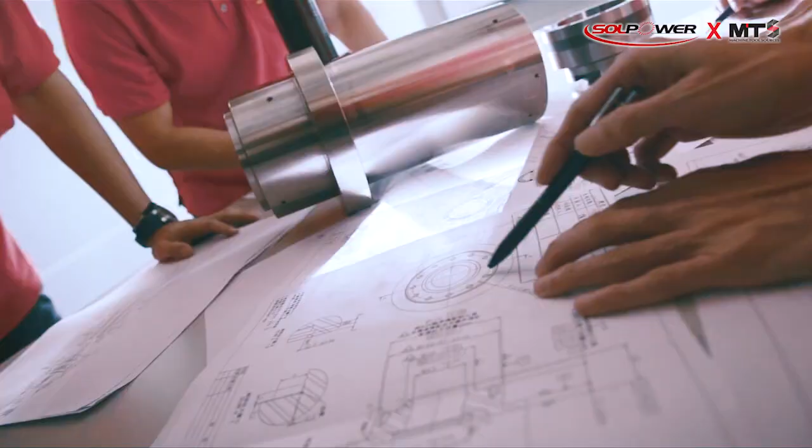We also have some components here, components of a motorized spindle. So what are we seeing here in front of us? Well, it's just a few components. The motorized spindle itself has a lot of components, but generally speaking, the most important parts are the shaft itself, the spacer, the encoder, and the bearings, front and rear bearing. And of course we could get into even more details, but we're trying to get some of the most basic facts. I'll try my best to highlight some.

Now, the spindles. We see three types here in front of us to illustrate the different applications. Maybe you can share a little about the main applications here at Solpower. The milling spindle for milling applications, turning built-in spindle, and woodworking. Also for woodworking, built-in motor applications as well.

Now, I just mentioned benefits of motorized spindles. We talked about the saved space, but there is more. So why don't you give us the main advantages of a motorized spindle compared to other spindle types? Well, the main advantages are high speed, higher speed, high precision, low vibration, very small size, and very easy to install.

We'll be talking about all those things in more detail in a few moments, and we'll also see some inspection processes, inspection equipment, QC, QA measures, and so on. But of course, quality starts at the very beginning, and the very beginning is the design process. So you manufacture and design your spindles 100% yourself, right? Absolutely, yes. So that's why we want to focus on the design process, and we're going to go through the main steps of your design process right now. Sounds good.

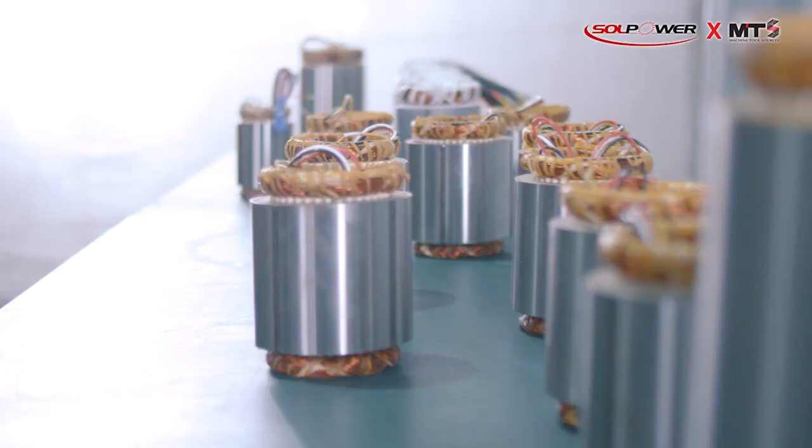Let me start with the heart of the motorized spindle: the motor itself. It's made in-house, we made it here at Solpower. So even the motor itself is manufactured by Solpower. Absolutely, you're not using motors from other manufacturers. No, for the past 25 years we have been manufacturing the motor itself. It's one of your core technologies, motors, right? Of course, yes. That's how Solpower started out, as a motor supplier.

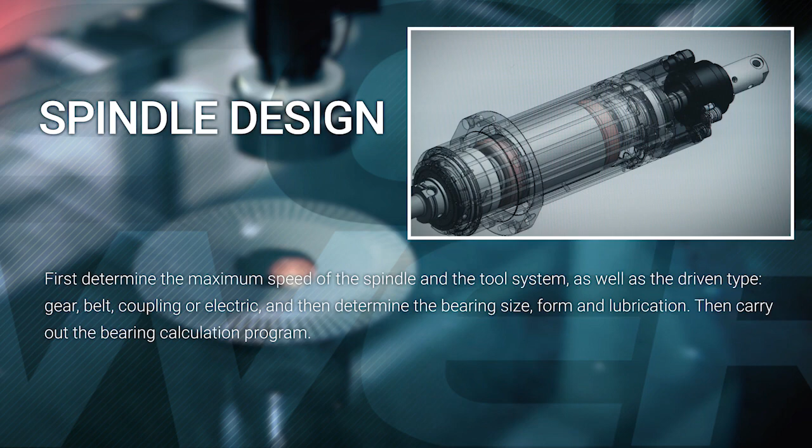So how do you want to show us and tell us about that design process? Okay, well, let's start off with taking a look at one of our motorized spindles. All right, yes, let's do it.

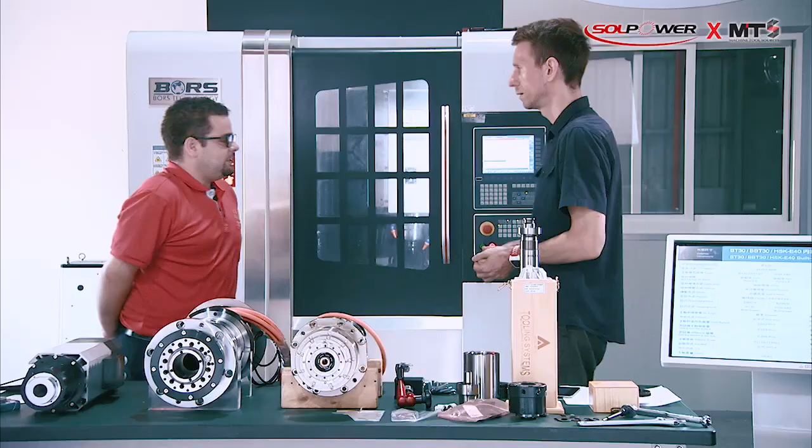So we're seeing a specification sheet of one of your spindles. Yes, this is one on our catalog. Our customers can find it on our page, one of your motorized spindles, that's what we're talking about today. So, well, what do we see? What do you want to tell us?

Well, before we start building and manufacturing the prototype, we have to determine three things. The first one is the interface, the housing. How big is it in terms of size?

And the second thing, we have to know the maximum speed of the motorized spindle, so the requirements of your customer. We have to determine that. Spindle speed, that's 24,000 RPM. That's pretty fast, right? Actually, pretty high, not that fast when it comes to Solpower.

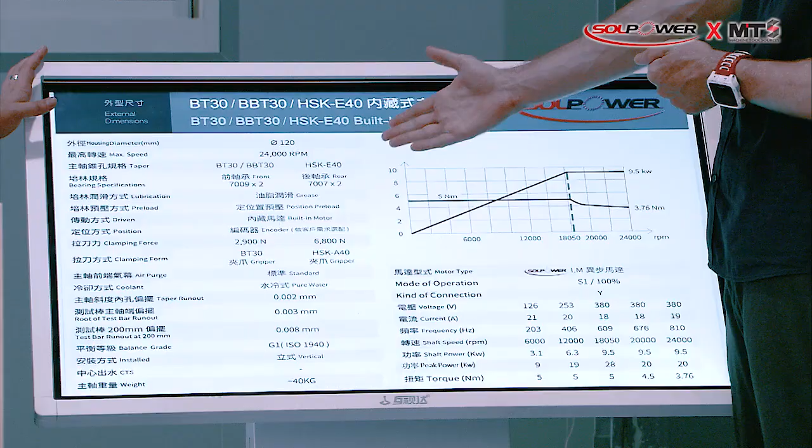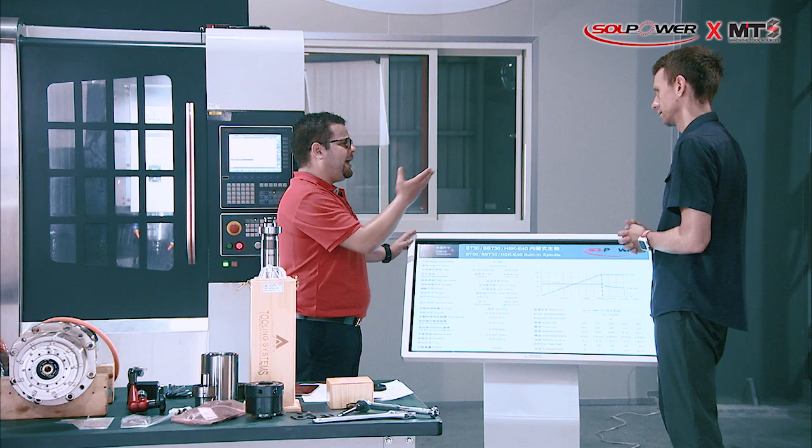The third thing we have to determine before we start the prototype is the bearing calculation procedure, what kind of tool system we're using, as you see here.

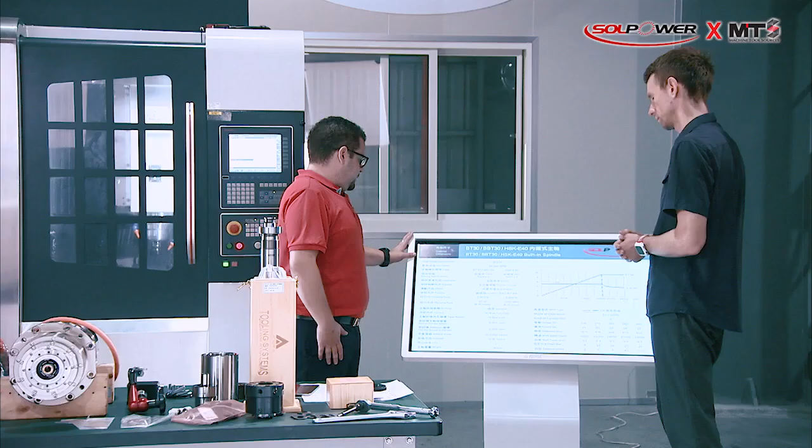So we've got all those parameters, and say I need a different diameter, different maximum spindle speed, and most of these parameters can be customized. Absolutely, yes. The housing, the speed, the bearing specification. The lubrication, it's grease, but some customers require oil air.

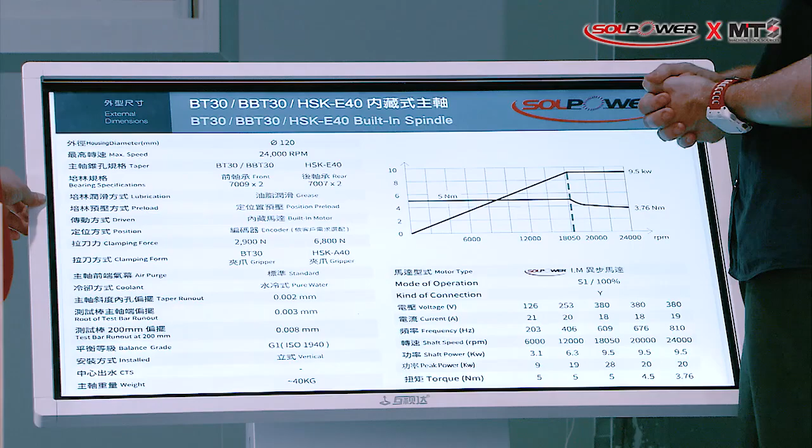See here, the built-in motor. Some customers require asynchronous, some require synchronous. Okay, so again, different types of motors as well.

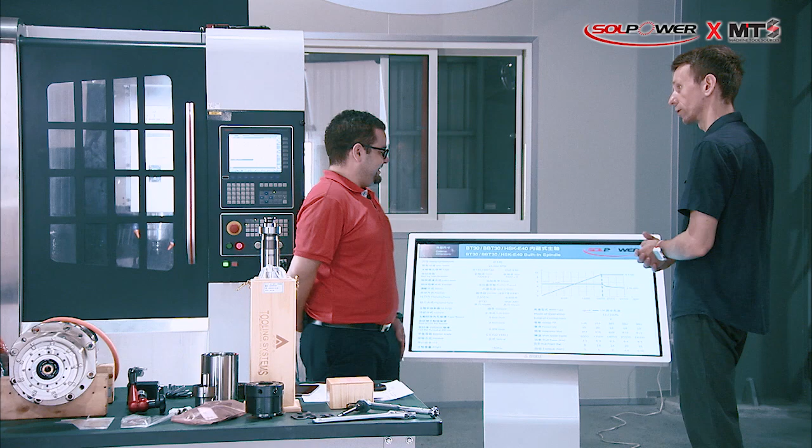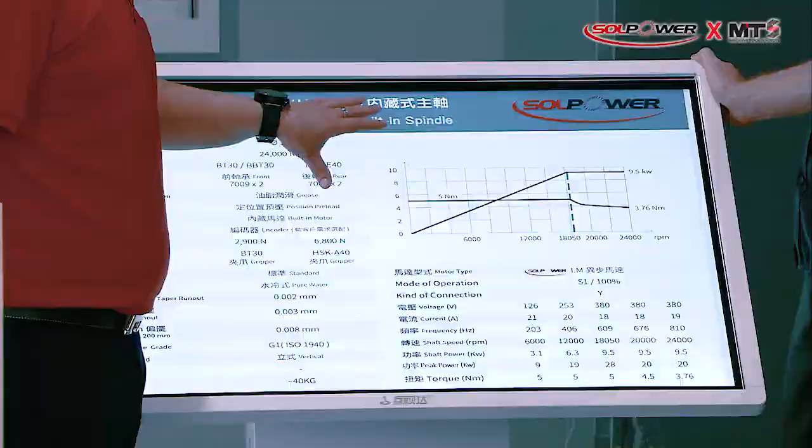We talked about the motor, you said it's the heart of the spindle, and we also have a spec sheet for a motor, right? Yes, of course. I have to specify something here. You will never see this kind of specification of a motorized spindle in any other companies. Why is that? For one reason, because we made this in-house.

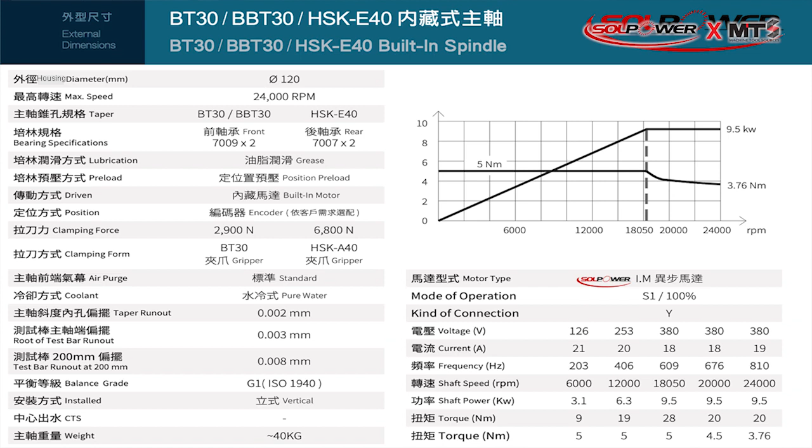The motor inside the spindle, so that's what we talked about already. You manufacture your motors 100% yourself, it's built in-house. So those are customized. Even the torque, the shaft power, the shaft speed, it can also be customized and up to the customers to decide that.

Great, so that's the very first step of the design process, just determining what do we need, what kind of specifications do we require from you. Well, after that, we'll make an initial blueprint of the bearing calculation procedure.

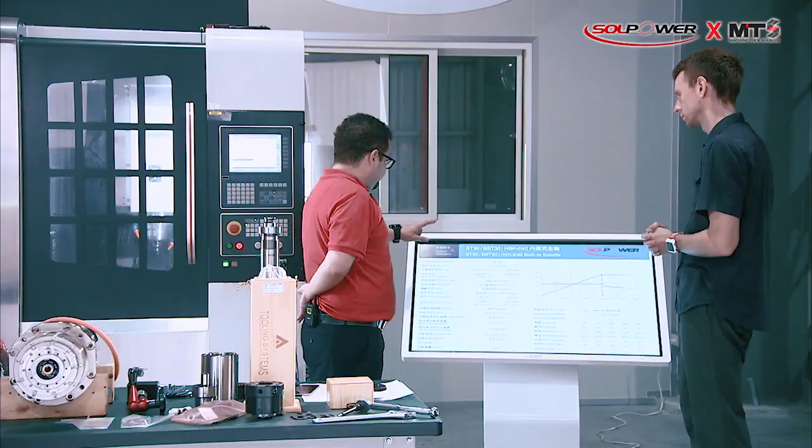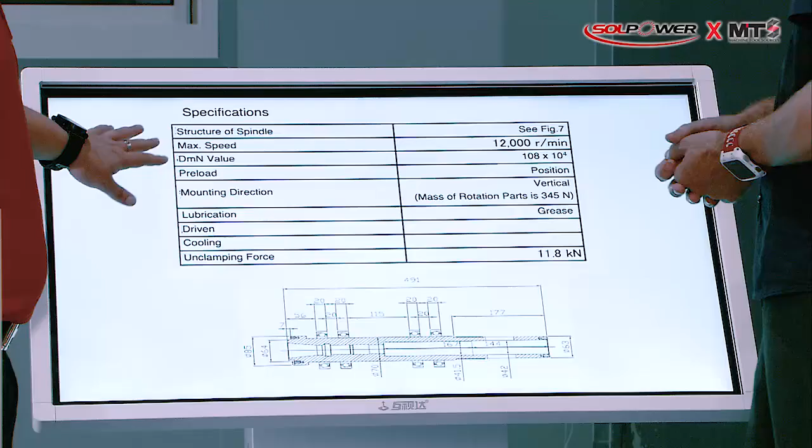Here you go, as you see, the first thing is the structure of the spindle. The second thing, we add the maximum speed. We'll add the DMN value. Here at Solpower, we can reach up to 200. And the mounting direction here is vertical, but of course it can be horizontal as well.

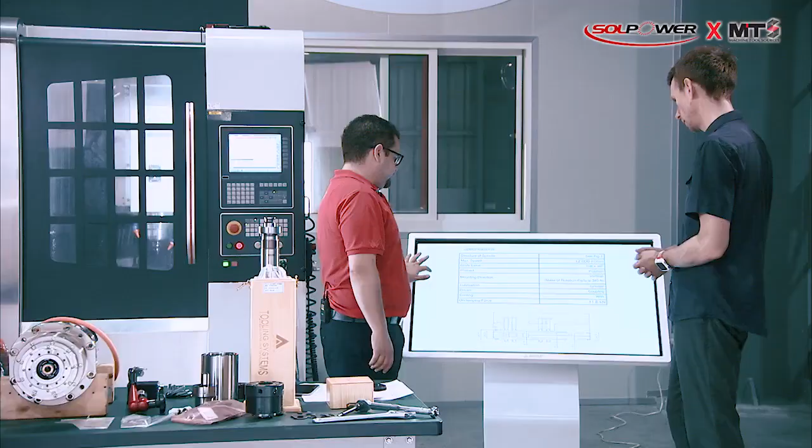The lubrication here is grease, but as you just mentioned, we can customize this to oil air as well. Here we use more of the design parameters. So what else do we want to focus on here in this chart?

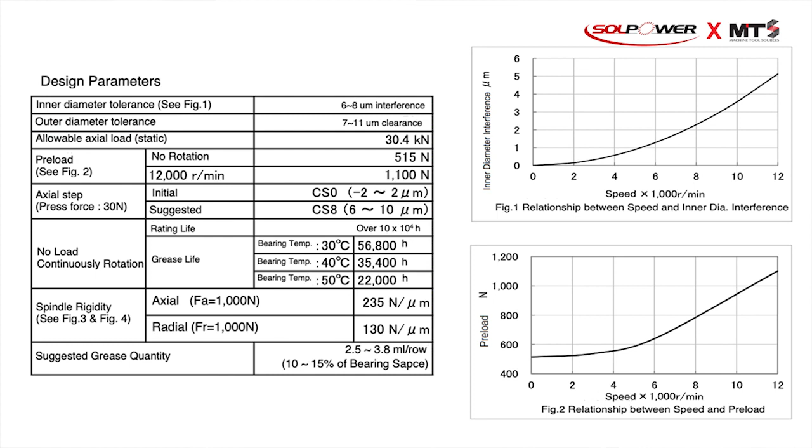Here we entered the interference value between the inner bearing, the inner rings of the bearing, and the shaft. And the second here, it's the clearance between the outer ring of the bearing and the housing. So this is obviously tolerance, we're talking about accuracy, interference and clearance as well.

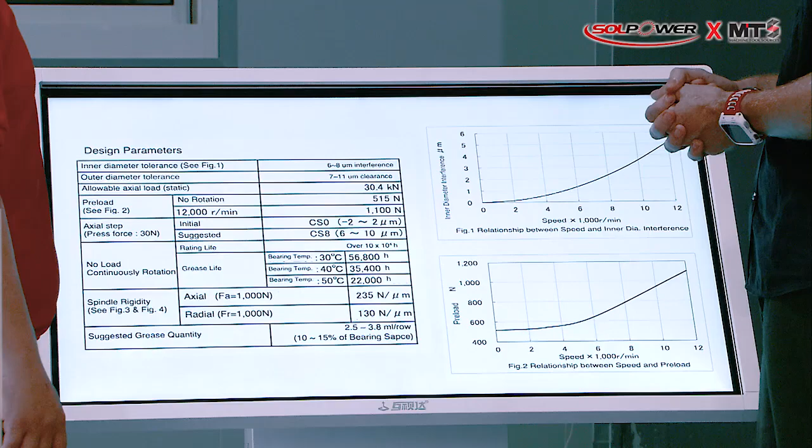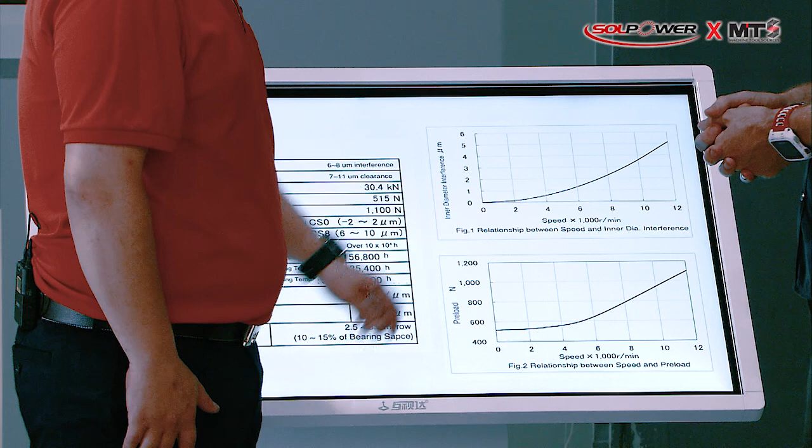Yes, of course, most importantly, we get the spindle rigidity. And as you know, the rigidity in the spindle is one of the most crucial, most important factors here, axial or radial. And those diagrams, those are the calculations, what you expect from this spindle performance. Yes, you can say so.

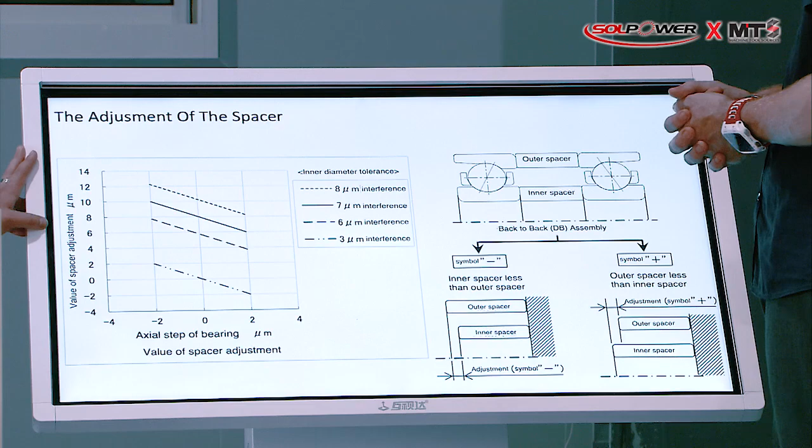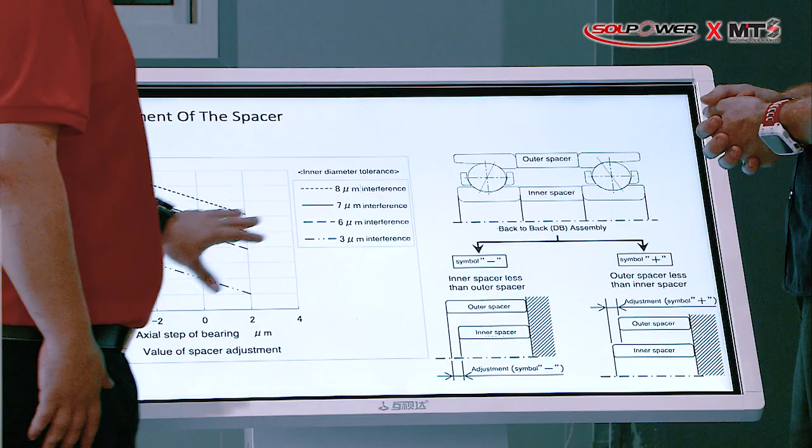And here, spacer, we use the correction amount of spacer data to do our preload adjustment. So here, the inner ring, the interference between the bearing inner ring and the shaft. Here, we'll know the correction amount data of the spacer ring which needs to be grinded. We can see very low tolerances, very high accuracy, and that's one of the main advantages of the motorized spindle.

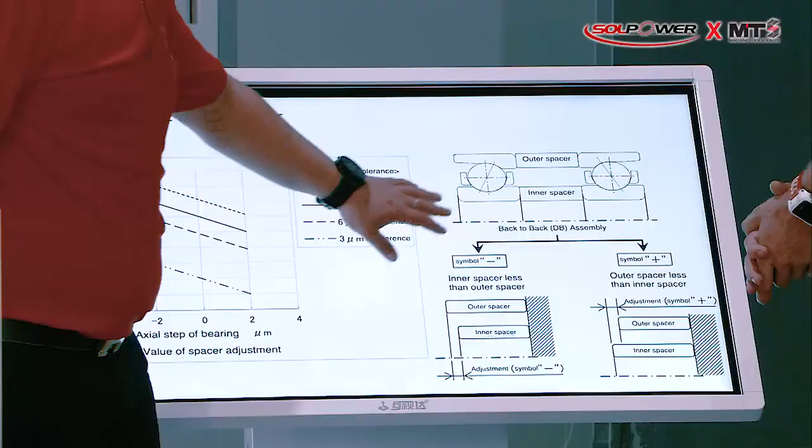When the outer ring of the spacer is higher than the inner one, the preload increases. When the outer ring of the spacer is lower than the inner one, the preload decreases.

That's the basic thing you have to pay attention to when it comes to the spacer. It's kind of an overview of the blueprint. At the very first stage of the design process, those were the basic calculations you have to perform on the bearing.

Yes, it's a must. And then the next step, before production, would be to manufacture a prototype. Let's talk about it more here.

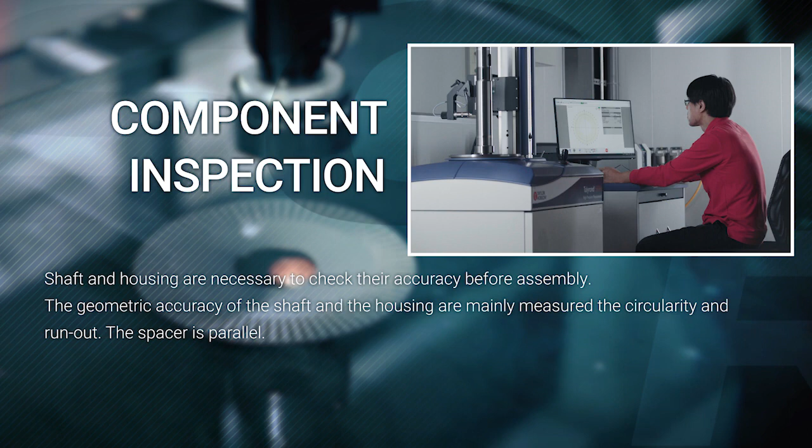We talked about the components earlier, shaft, spacer and whatnot. So how do you make sure that whatever design, drawing, and calculations, the theoretical stuff, you have the spindle that you want to manufacture, and then you have the prototype. How do you check the quality of these components to ensure the spindle performs as expected?

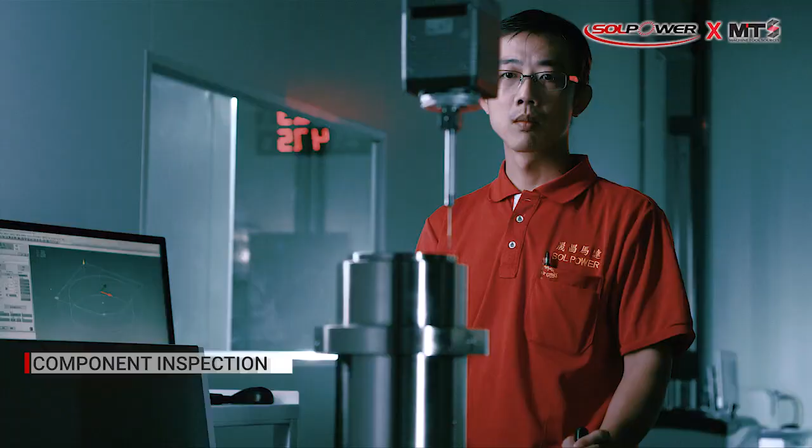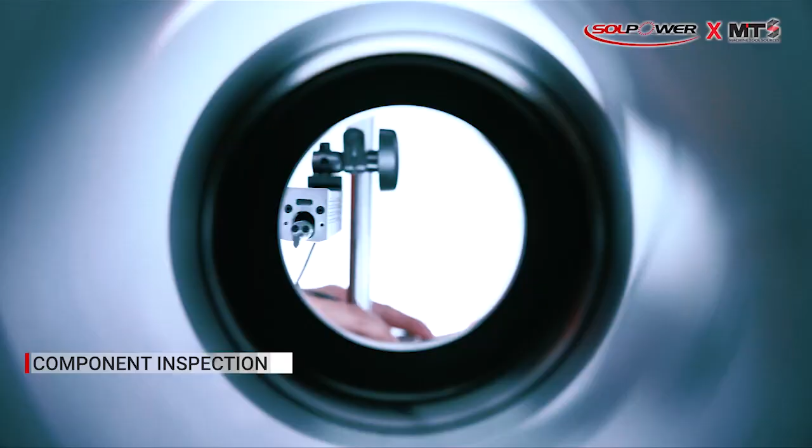Well, the inner parts of the motorized spindle are very, very important. We focus on the precision of it, it has to be ultra precision—the shaft, the spacer, etc. So we use many devices and instruments, such as roundness detection devices and 2D, 3D inspection instruments, to measure the deflection, the roundness, and the cylindricity.

Regarding the spacer ring, we focus on its parallelism—roundness testing, parallelism, and 3D coordinate measuring. You've got all that equipment here in-house, so you have the capabilities to perform those inspections. Absolutely, and I can take a look later on.

We'll split it up because there are two big areas when it comes to testing: dynamic measurements and static measurements. I think we also have the run-in and the clamping measurement. Do you want to show us some of the testing right now? Let's start with the dynamic measurement.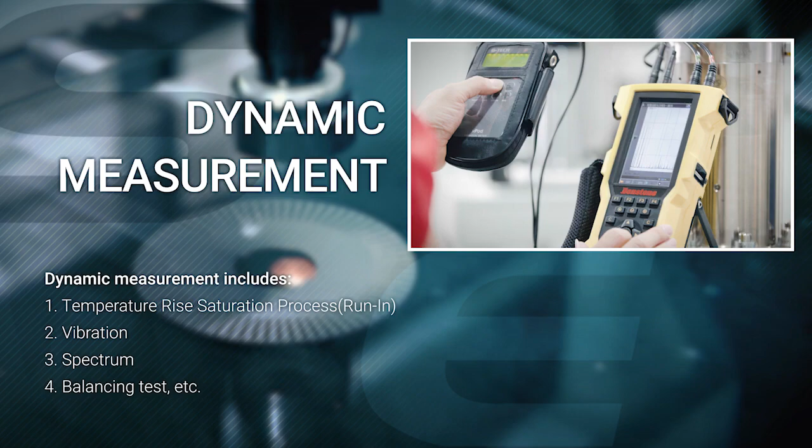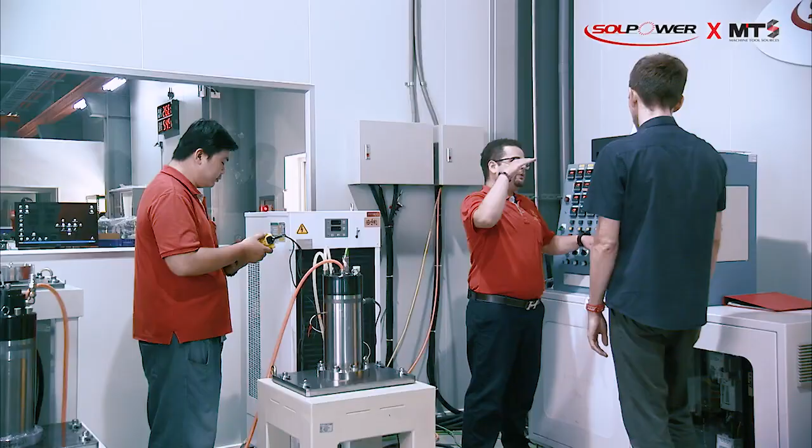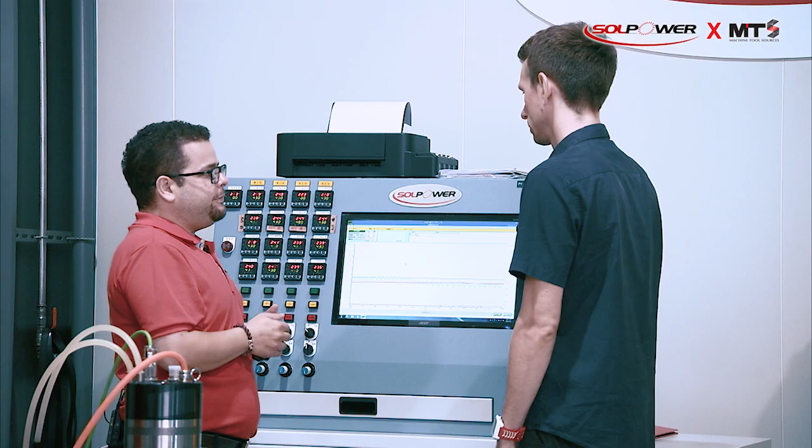One of our first items on the dynamic measurement testing for motorized spindles is the temperature saturation process, aka run-in test. Here we monitor and record the temperature rising stability from 0 to its maximum high speed RPM, adding 1000 RPM each time in incremental steps until we reach its highest rotation speed, measuring the temperature at each step.

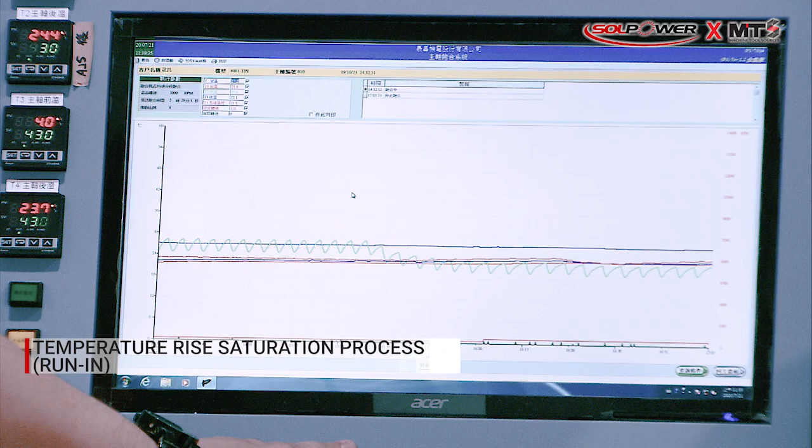As you see here, it's the temperature in degrees, the maximum is 60. Here is the timeline, and there is the revolution per minute, the RPM, spindle speed, until we reach its maximum. Under normal circumstances it won't exceed 30 degrees—that's the goal. We have to record every step all the way.

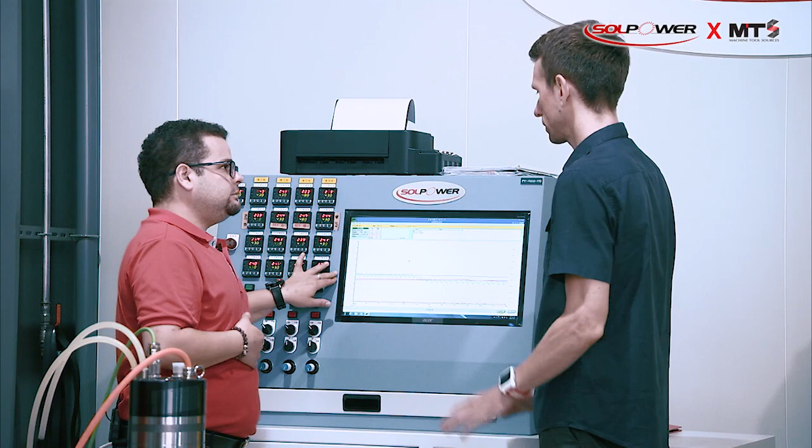So that was the run-in test, but that's only one of four items on the dynamic measurement list. What's up next, what else do we have?

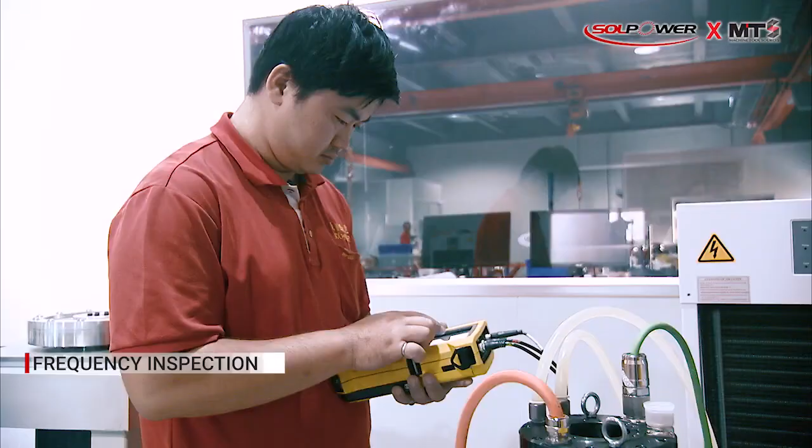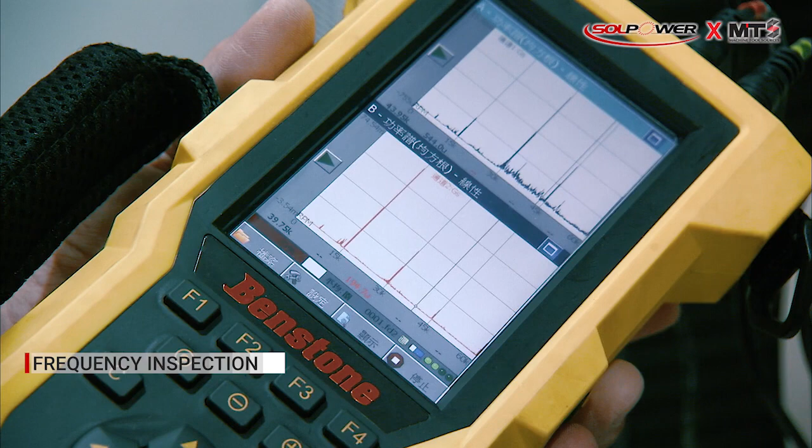The second thing I see here is the frequency measurement. The frequency analysis is to measure the spindle operation, making sure the spindle rotation is perfectly good. As you see on the screen, when the first, second, third order are gradually decreasing, that means the spindles are perfectly good—perfect Solpower quality.

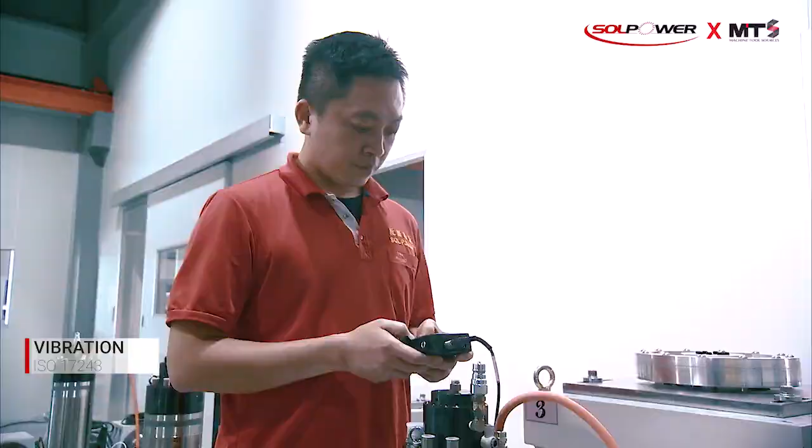Now another important topic, vibration. You want to keep it low, because it's very important for the accuracy—one of the main advantages of the spindle is to have low vibration. Our vibration measurement here at SolPower is based on ISO 17243, the highest international standards for vibration. The rotation speed starts from 600 RPM till 30,000 RPM, and it's also suitable for roller bearing and ball bearing as well.

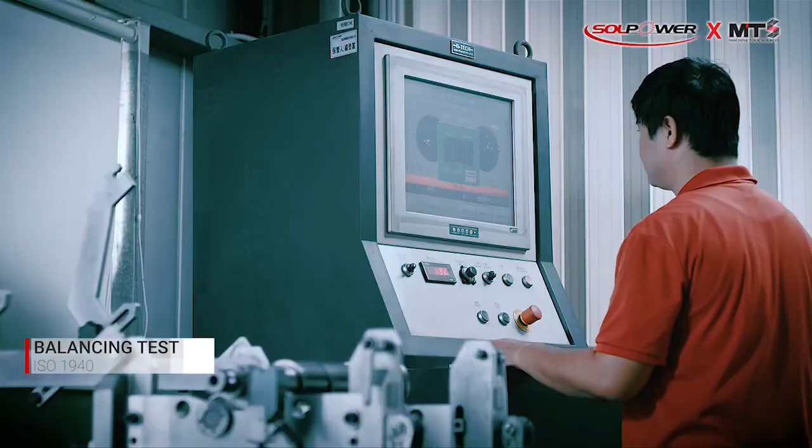So that's vibration testing. Now we have one more item on the list when it comes to dynamic measurements: balancing. We want to keep the spindle well balanced, to integrate the central line of mass with the rotational axis.

So we'll have high accuracy and a better surface finish, a higher removal rate, and increased tooling life. Four things people looking for a motorized spindle will very much care about. Of course, these are among the main advantages of the motorized spindle itself, to be very high accuracy, high precision.

And I think here you're also testing according to ISO standards, right? Yes, our balancing inspection here at SolPower is based on ISO 1940. So again, meeting international standards? Yes, absolutely.

Actually, the mechanism behind the motorized spindle is very complicated. It is indeed. Most of our dynamic measurements have to be done twice, so we have to make sure there's no space or place for error. So meeting 100% quality? Absolutely, 110%. Yes, excellent. So that was the balancing, the last item on our dynamic measurement list.

But now we want to move on to the static measurements. Yes, and I believe we have to go to another area. You want to take me there now? Yes, please. Let's go.

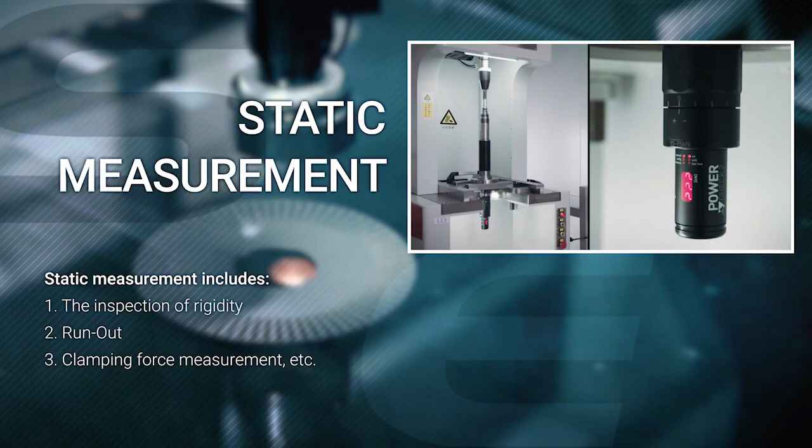All right, Sam, so we just covered dynamic measurements and now we want to talk about static measurements, right? Of course. We're going to start talking about rigidity first, then clamping force, then we'll end up with run out.

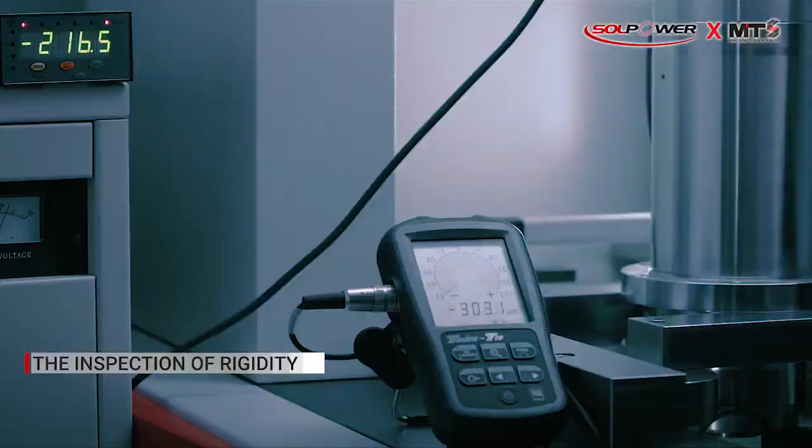Well, at SolPower here we have to focus on two things: the axial rigidity and the radial rigidity. These are very important. Obviously rigidity is very important because it has a lot to do with the quality of the workpiece you're working on. So those inspections, the axial and the radial, have to pass our measurement, in order to ensure our customer that he can get the quality he required. That's the main target, that's the main goal.

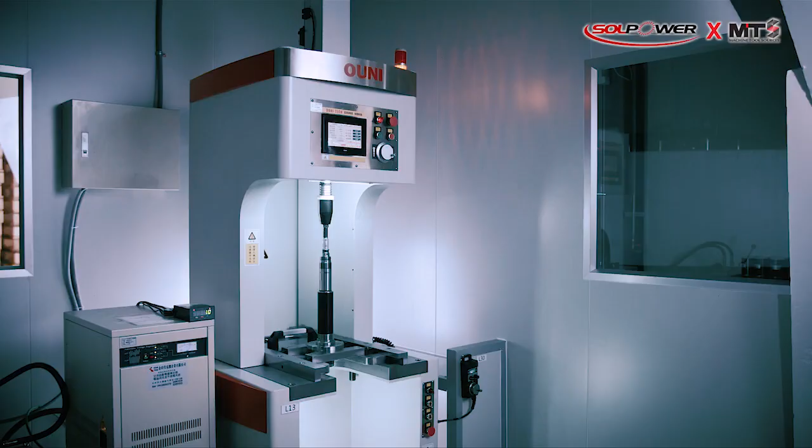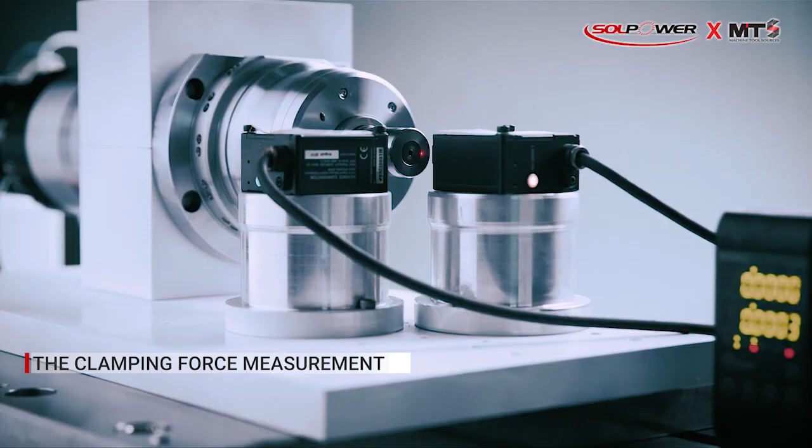Okay, so what else do we have? We have the clamping force. Besides testing the clamping force, we need to test the draw bar endurance. Besides the draw bar, we have the axial thermal growth of the shaft. Very technical, yes, because we have to ensure the quality of our motorized spindle, our built-in spindle, in order to get the best quality we can achieve.

Okay, we just talked about the dynamic measurements, then the static measurements and additional inspections. So altogether, I think like 10, 11, 12 different inspection procedures for your motorized spindle. Well, I stopped counting a while ago. I don't know how many, but it's quite a lot, and I think there's even more that you want to talk about. The mechanism behind that is very, very wide.

And another thing you mentioned earlier is the runouts. I think there's a runout still, yes. Okay, finally we're going to be talking about the runout. There are 4 positions to measure before shipping out the spindle itself.

The taper, inside the taper, we have to measure the accuracy. It should be, and actually it must be, less than or equal to 0.002 millimeter. The second position is the taper face itself, outside. We have to measure it the same way, with the same tolerance of 0.002 millimeters.

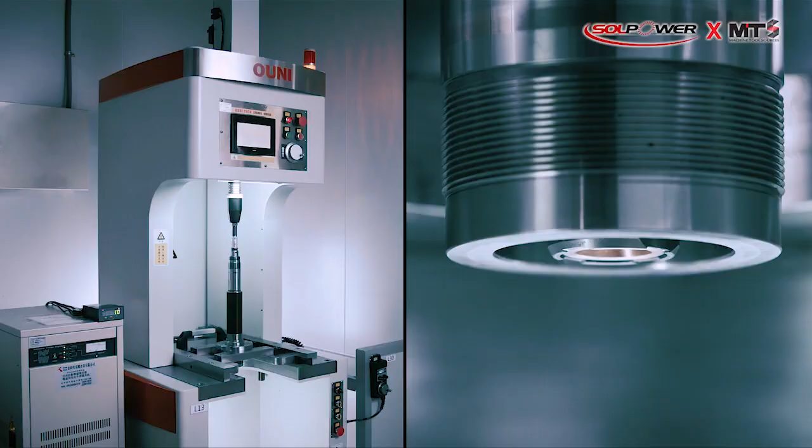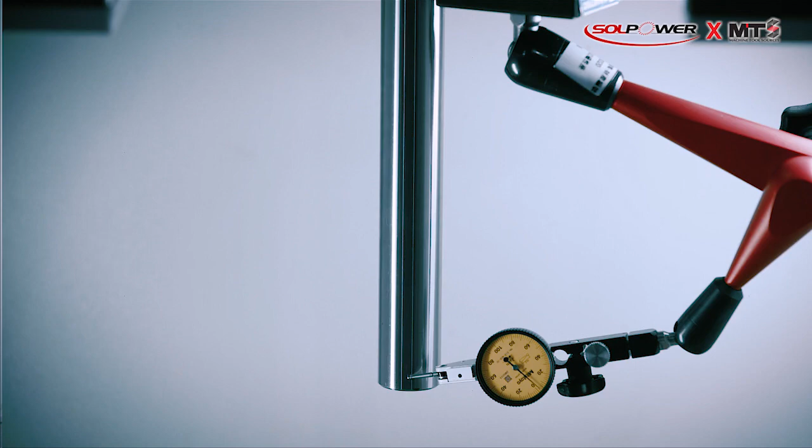The third position we have to test is the root of the test bar, which has to be equal to 0.003. Then the fourth part, we have to test the test bar itself, run out, which has to be equal to 0.008. Okay, so that was the run out inspection, right? Yes.

Thank you, Sam, for showing us dynamic measurements, static measurements, and all the other inspections. But there's even more. But there are some inspection procedures that you couldn't or wouldn't show us, right? Well, yes, it's a policy. There are some customized machines, made for SolPower.

Not meant for the public. Absolutely, yes. Okay, beautiful. So I think we're done here, but I know that you want to share even more.

With us today about your capabilities when it comes to the manufacture of motorized spindles, right? Absolutely. What about we go back to where we started? Okay, let's go, let's go.

Wow, so we've just seen what really goes into the design, the manufacture, the development of a motorized spindle, right Sam? We talked about the design process, all the calculations you have to perform, and then all the testing, all those inspections we've just seen. So it's not an easy task to develop, to manufacture a motorized spindle.

Of course, that's why the main advantages of the motorized spindle are high precision, high speed, low vibration, compact size, and easy to install, as I mentioned before. So it has to be ultra precision to do that, yes.

And if you want to achieve ultra precision, you need the knowledge and a big team, right? You have a huge R&D team as well. We have almost 30 to 35 manpower, with over 20 years experience in this field.

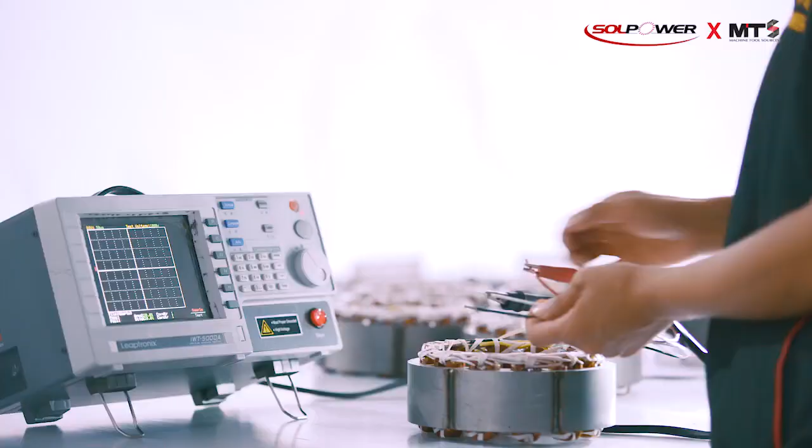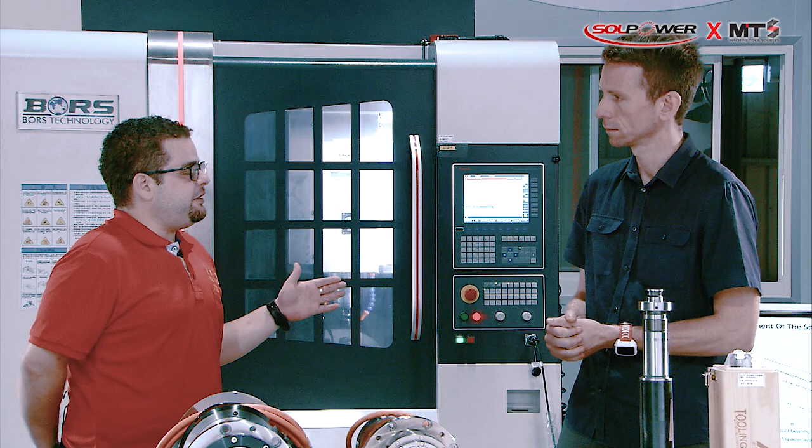Okay, when you say these capabilities, you're talking about manufacturing motorized spindles in-house? Actually, the motor itself is the heart. Solpower has been manufacturing the motor since 1995, and Solpower motors are globally well known. So starting from the motor itself, we manufacture the whole part of the motorized spindle. There is no need to go to B or C or D to get your motor and put it inside.

Okay, so that's not Solpower. You don't see yourself as B, C, D, E. We're not a B, C, or D. We already proved ourselves enough to be an A. There is none in Taiwan who can manufacture the motor, synchronous or asynchronous, and manufacture the spindle from A to Z in-house, except A, Solpower. Okay, excellent. I like your confidence, Sam.

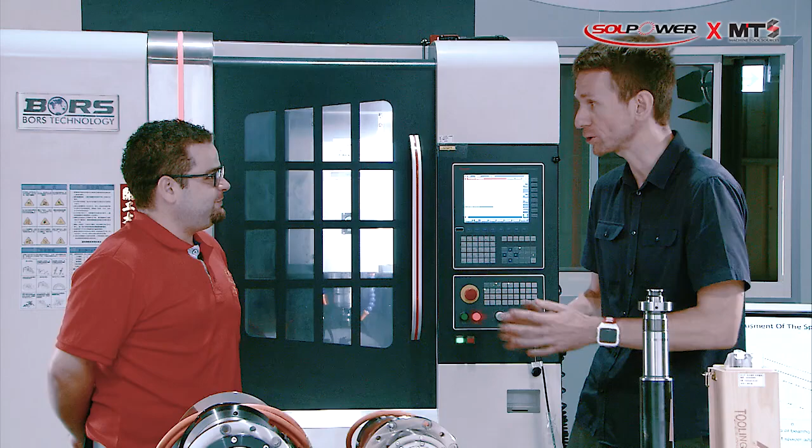If you're looking for a supplier that can help you with the manufacture of motorized spindles from the beginning to the very end, the design, research of the spindle and the motor itself, testing, prototyping, manufacture and after-sales services, well, then Solpower might be the best choice for you.